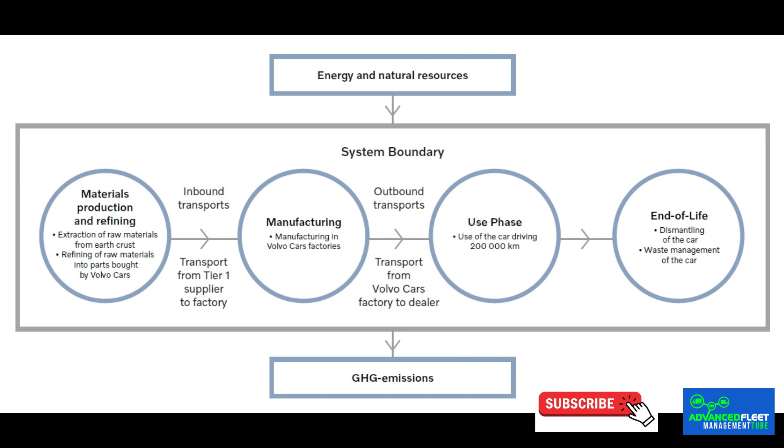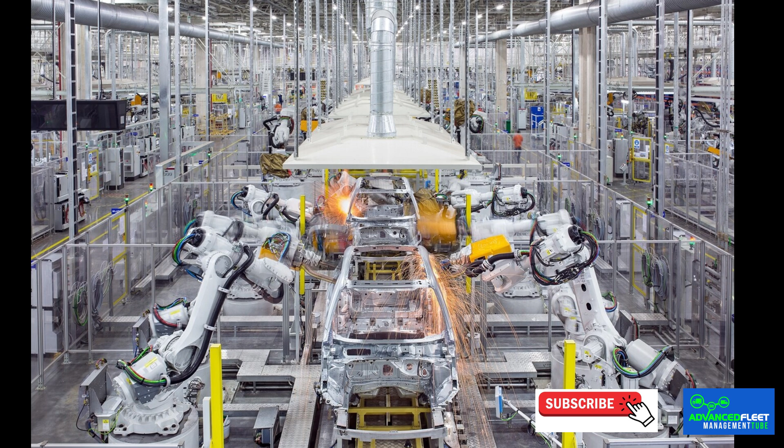And what has Volvo discovered? Manufacturing an electric XC40 involves 70% more CO2 emissions than manufacturing an XC40 with an internal combustion engine, since both cars are built on the same platform and share many of their parts. If we talk only about materials and components, leaving aside battery cells, the manufacturing of an XC40 Recharge causes almost 30% more greenhouse gas emissions compared to the XC40 gasoline, mainly due to the higher use of materials in the XC40 Recharge and the higher proportion of aluminum.

Manufacturing an electric car emits more CO2 than manufacturing a gasoline car. This means that these electric cars arrive at the dealership having already emitted more CO2 compared to the gasoline version. Now, we must also take into account the use of the car. Once they begin to circulate, the electric car will hardly involve CO2 emissions, while the gasoline car will continue to emit CO2 in greater proportions. While the carbon footprint of electric vehicles is being drastically reduced, that of gasoline is adding more and more CO2 to the equation.

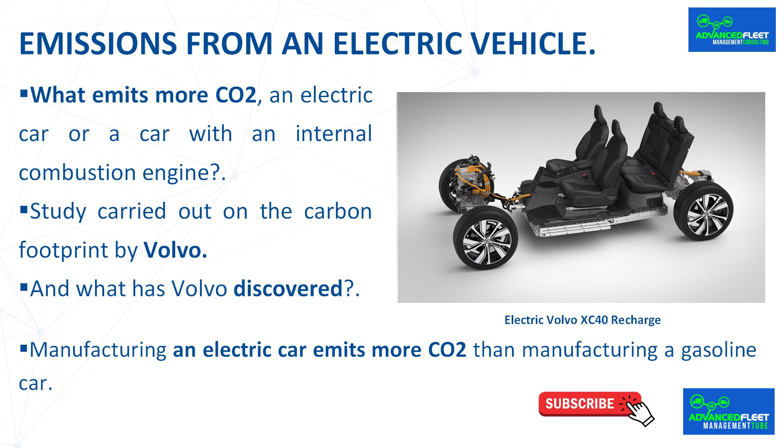The main reasons why producing an electric car has a much larger carbon footprint than manufacturing a gasoline or diesel car are well known. Most greenhouse gases are generated in the mining and processing of the various raw materials that make up the car and the battery, such as lithium, steel, or aluminum. Green NCAP claims that it pollutes less than one with a combustion engine if the entire life cycle of each one is taken into account, around 30% less.

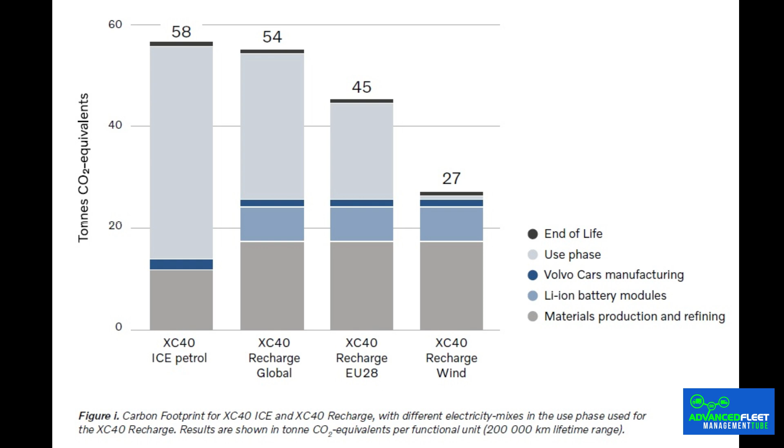Tons of CO2 equivalent. The total polluting emissions for a use of 200,000 kilometers are as follows. The internal combustion XC40 has the most total emissions with 58 tons of CO2 equivalent, followed by the electric with 45 tons of CO2 equivalent, and in first position is the wind-powered electric XC40 with 27 tons of CO2 equivalent.

Implications in fleet management. The most important conclusion is that to achieve the maximum reduction in CO2 equivalent emissions, the electric vehicle with renewable energy must be used for around 200,000 kilometers. It must be considered that if the battery has to be changed to continue using the vehicle, the total pollutant emissions increase and the balance point would be higher. It may happen that we purchase an electric vehicle and do not reach the necessary kilometers from the equilibrium point, and it pollutes more than its gasoline counterpart.

In passenger cars and SUVs in a fleet of vehicles, it is recommended to have a renewal policy of 4 or 5 years and at most 150,000 kilometers, to have new vehicles because they have the latest technologies in safety, batteries, regarding the environment, consumption, etc. Renting contracts for passenger cars or SUVs for this type of vehicle are usually 15,000 kilometers and 4 or 5 years. So in the best of cases, renewable energy would only offset a very low figure of CO2 emissions. And with the mix of the European Union, the emissions would be higher than its gasoline counterpart.

Currently, it is advisable to purchase electric vehicles on rent due to their high depreciation, but to achieve a considerable reduction in polluting emissions by using the electric vehicle with renewable energy, it is necessary to travel about 180,000 to 200,000 kilometers, which is the average run by fleets whose vehicles are more than 8 years old, so you must acquire the vehicle as ownership because there are no leasing companies that make contracts of more than 5 years on this type of vehicle.

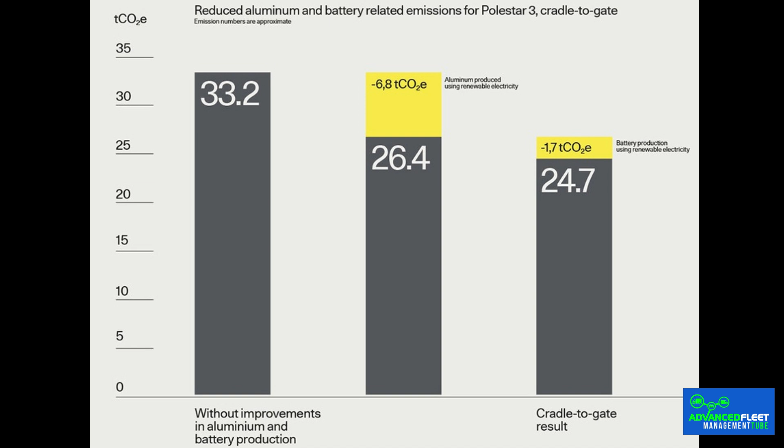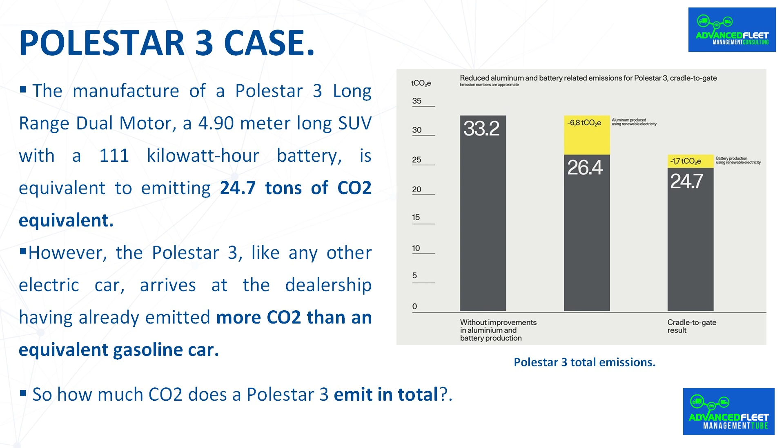In the same scenario, a gasoline Volvo XC40 will emit 58 tons of CO2 equivalent over its entire useful life of 200,000 kilometers. That is to say, even in the worst-case scenario, an imposing Polestar 3 will emit less CO2 than a much smaller and less powerful gasoline car such as the Volvo XC40.

Lithium extraction. With the need to reduce CO2 emissions via the massive use of lithium-ion batteries, we could be creating another problem, just as harmful or more so. Lithium is not found in a free state in nature. It is dispersed in rocks, clay, and brine, a mixture of water and salts. Its extraction is slow, consumes a lot of energy, and requires large quantities of water, an increasingly scarce resource.

To extract lithium from rocks, as is particularly the case in Australia, which is the world's largest producer, and in China, it is first necessary to crush them. After this, water is added to form a paste that is placed in a tank where the air allows the lithium to be separated from the rock. After filtration, the obtained lithium powder is further refined.

To do this, it is heated to a temperature of up to 1000 degrees. Chemicals and water are then added before another filtration. The process, which takes between 1 and 2 months, is expensive due to its high energy consumption. In addition, the use of water and chemicals makes it not very respectful and friendly to the environment.

In the salt deserts of Argentina, Bolivia, and Chile, home to the world's largest lithium deposits, the metal is found in brine, a mixture of water and salts. To extract it, you have to pump the brine from the depths and then place it in giant pools so that the water evaporates. Once the salts have solidified, they are moved to the bottom of the pools after 12, 14, or 16 months, depending on weather conditions.

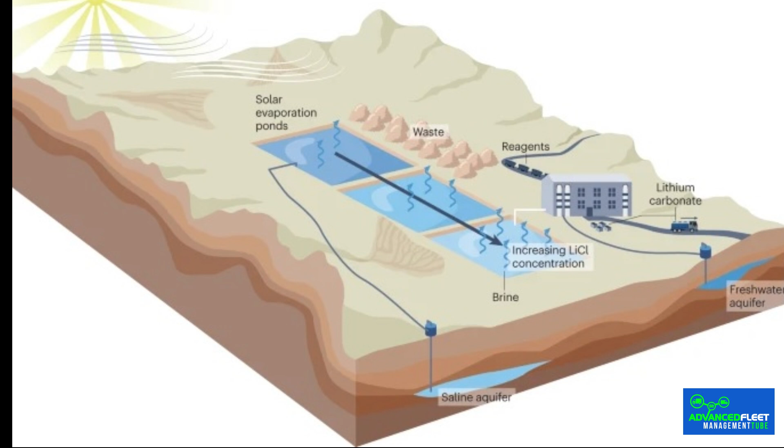The aqueous solution obtained is transferred to another plant, from which, after filtration and the addition of chemicals, lithium carbonate and in some cases hydroxide will emerge. Although less expensive, this extraction method is also slow and above all consumes large amounts of water. Lithium is essential for electric car batteries, and the demand in the next decade will be enormous.

Lithium is present in small quantities in the anodes and cathodes of the cells that make up the battery, and an electric car battery has on average about 160 grams of metallic lithium per kilowatt hour. Manufacturers do not usually reveal that information. Lithium is found in fragile ecosystems.

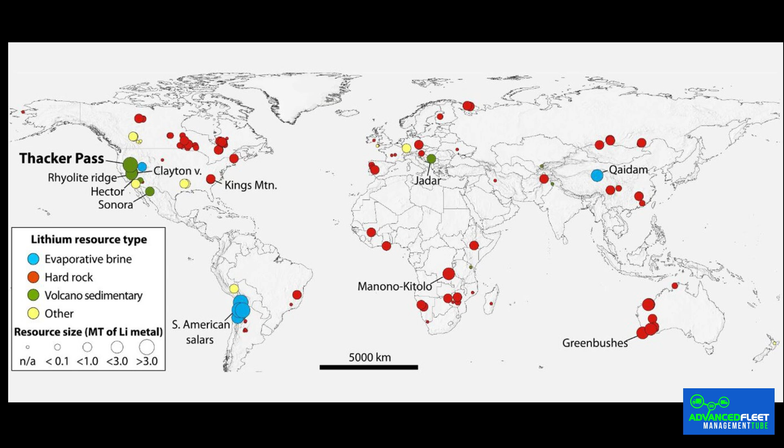It is true that there are large deposits in Chile, in the Atacama Desert, and in the Uyuni Salt Flat in Bolivia, as well as in the province of Salta, Argentina, which is already the third largest producer in the world. In these cases, extraction is quite simple and a priori with low impact in an already arid area, and yet it takes about 2 million liters of water to produce 1 ton of lithium. This enormous water consumption not only affects the surrounding ecosystems, but also has a huge impact on local farmers.

According to the Environment and Natural Resources Foundation, Lithium Extraction in Argentina 2019, which interviewed the 10 communities that live near 2 salt mines, Sales de Jujuy and Minera Exar, the mine's detractors say they are concerned about the long-term impact of lithium on the environment, starting with the lowering of the water table, stating that livestock in the region have already begun to die. The consequences of mining on the ecosystem have also been seen in other regions of the world.

In May 2016, hundreds of protesters threw dead fish into the streets of Tagong, a city on the eastern edge of the Tibetan Plateau. They had been pulled from the waters of the Liqi River, where a toxic chemical leak from the Ganzizhou Rongda lithium mine had wreaked havoc on the local ecosystem, and it could go further. Research conducted in Nevada, where lithium is also mined, found impacts on fish up to 150 miles downstream from a lithium processing operation. Now the entire industry relies on the new deposits inside the Arctic Circle.

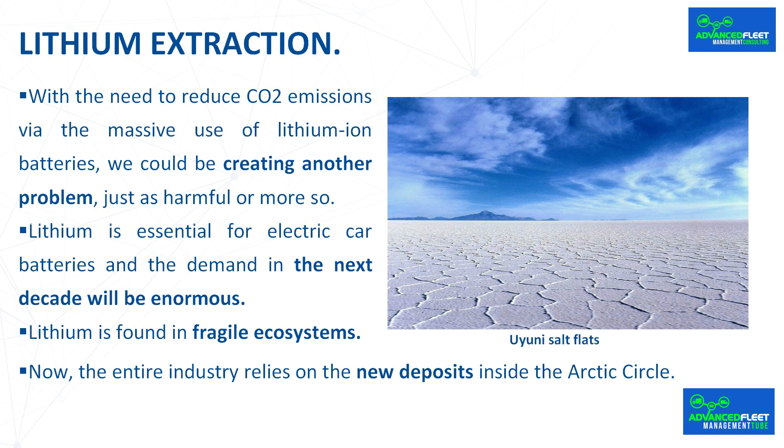Russian state mining company Rosatom, which also mines lithium for nuclear weapons, is studying the possibility of opening a mine on the Kola Peninsula by 2030. This site, called Kolmozero, is located within the Arctic Circle. Furthermore, also in the Arctic Circle, the Swedish company Arctic Minerals AB has reserved other exploitable land.

According to Jari Natunen, a mining expert at the Finnish Association for Nature Conservation, mining in the Arctic would be catastrophic. He says that the difficult extraction of lithium from the frozen earth would generate 50,000 tons of toxic waste for 1,000 tons of lithium produced.

The Arctic Circle has already borne much of the cost of materials for electric vehicles, as the Norilsk nickel mine, the most polluted place in the world, provides the material that is replacing the problematic cobalt and has only generated a new problem. Environmental implications of lithium extraction.

There are 4 environmental implications of starting a lithium mining industry. The viability of any lithium extraction project will depend on an adequate response to each of them. 1. Responsible use of water. Lithium extraction often involves intensive use of water in the mining and extraction processes, which can have an impact on local water resources. It is important to implement efficient and sustainable water management practices and ensure that water supplies for local communities, agriculture, or other essential uses are not compromised.

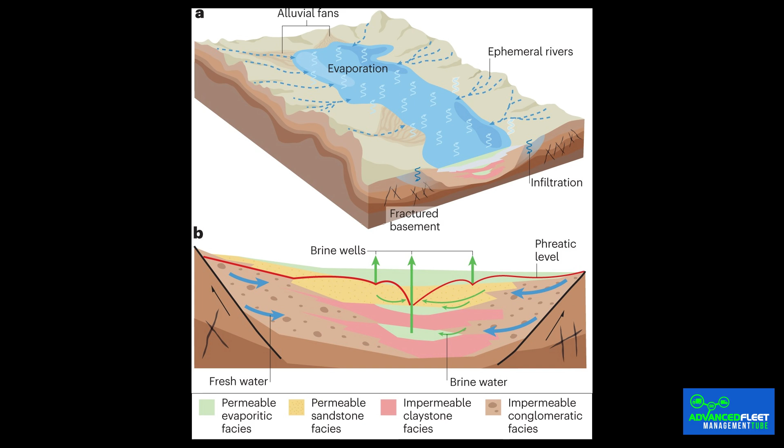2. The correct management of waste and chemicals must be taken into account. An industry of this type will generate waste and chemical emissions that must be managed appropriately. It is essential to carry out exhaustive environmental impact studies and apply mitigation measures to protect the biodiversity of the affected areas.

3. Energy use and carbon emissions. While lithium is a key component in the transition to cleaner energy, the extraction and processing of the mineral requires a considerable amount of energy, so it will be advisable to look for renewable energy sources that minimize the carbon footprint of the entire company supply chain.

4. Take into account the participation and consultation of local communities. Lithium extraction can have a significant impact on local communities, both in terms of employment and changes to their environment. For this reason, it is essential to involve communities in the decision-making process, provide clear and transparent information on possible impacts, and ensure that adequate risk and benefit assessments are carried out before starting any project.

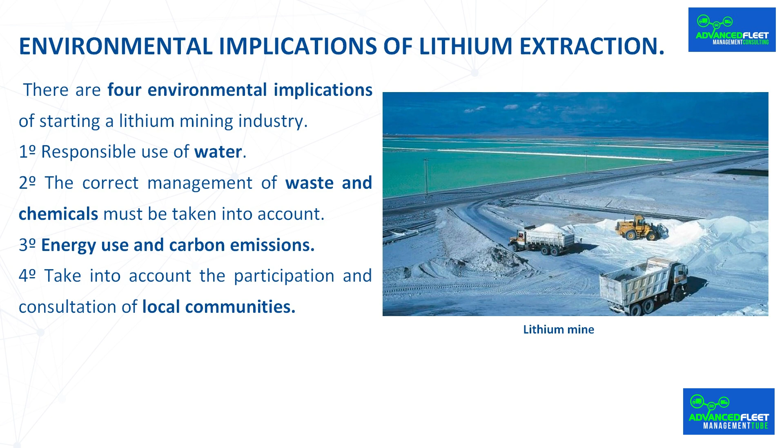The unknown emissions of electric vehicles. The dilemma of batteries and PFAS. PFAS are a collection of more than 4,700 widely used synthetic chemical compounds that accumulate over time in humans and the environment. Lithium-ion batteries found in mobile phones and electric cars also contain these PFAS. Research finds a new subclass of chemical contaminants, PFAS, used in lithium-ion batteries. It is becoming an increasing source of air and water pollution.

The team of researchers found that PFAS, specifically bis-perfluoroalkyl sulfonimides, exhibit similar environmental persistence and ecotoxicity to older well-known compounds such as perfluorooctanoic acid. The dilemma posed by the manufacture, disposal, and recycling of these chemical agents in a lithium battery forces us to develop recycling technologies and solutions that combat the climate crisis without releasing highly persistent pollutants.

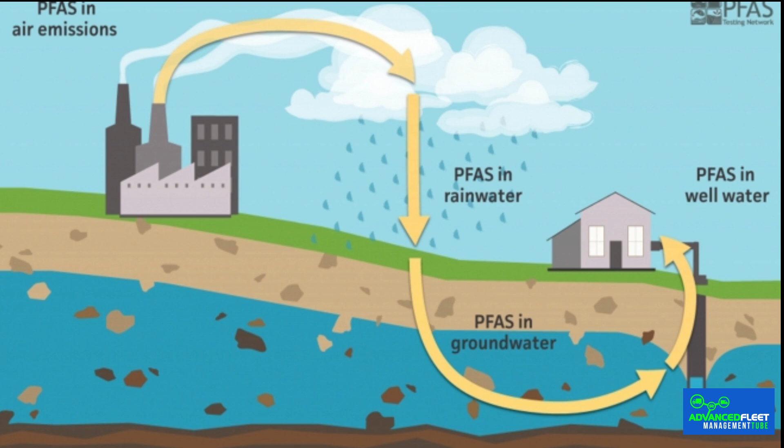PFAS and their drawbacks. Researchers sampled air, water, snow, soil, and sediment near manufacturing plants in Minnesota, Kentucky, Belgium, and France, finding high concentrations of bis-FASIs. Furthermore, atmospheric emissions of bis-FASIs can facilitate their long-distance transport, also affecting areas far from manufacturing sites. Analysis of municipal landfills in the southeastern U.S. suggests that these compounds may enter the environment through the disposal of products, including lithium-ion batteries.

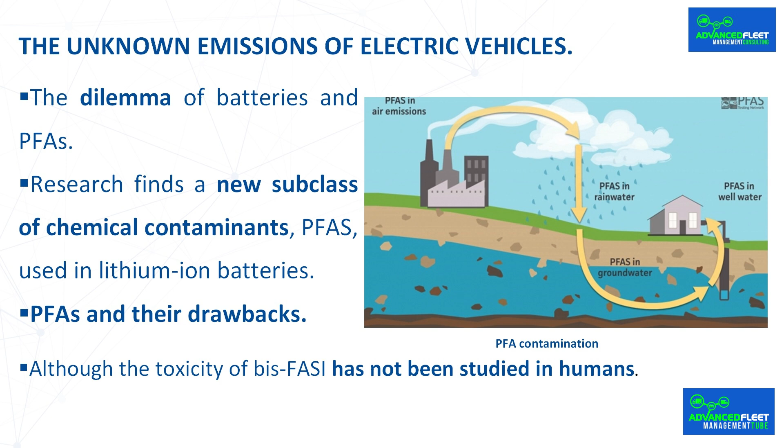Although the toxicity of bis-FASIs has not been studied in humans, other PFAS are linked to cancer, infertility, and other serious health harms. Treatability testing indicated that bis-FASIs do not break down during oxidation, but their concentrations in water could be reduced using granular activated carbon and ion exchange, methods already used to remove PFAS from drinking water. Treatments developed to remove PFOA and PFOS may also work for bis-FASIs, and their use is likely to increase as treatment facilities are upgraded to meet EPA's new maximum contaminant levels for PFAS.

Materials used in the electric vehicle. The most used materials in the manufacture of electric vehicles are aluminum, steel, and battery materials. The European Federation of Transport and Environment has revealed an analysis highlighting the importance of the use of green steel in the automotive industry. Steel produced using green hydrogen and electric arc furnaces or from scrap metal has the potential to reduce CO2 emissions.

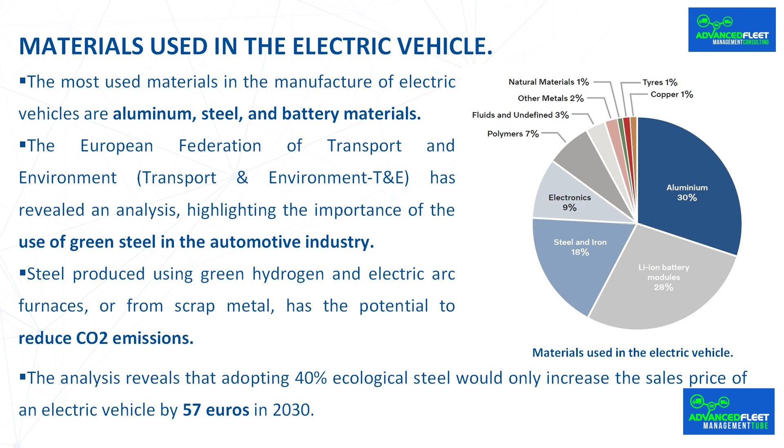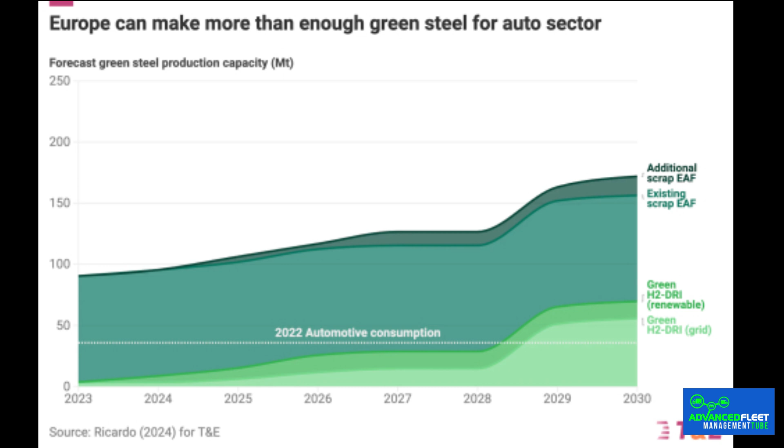The analysis reveals that adopting 40% ecological steel would only increase the sales price of an electric vehicle by €57 in 2030. Furthermore, achieving 100% green steel in 2040 would have a negligible additional cost of only €8 compared to conventional steel due to CO2 pricing and the reduction of production costs of green steel.

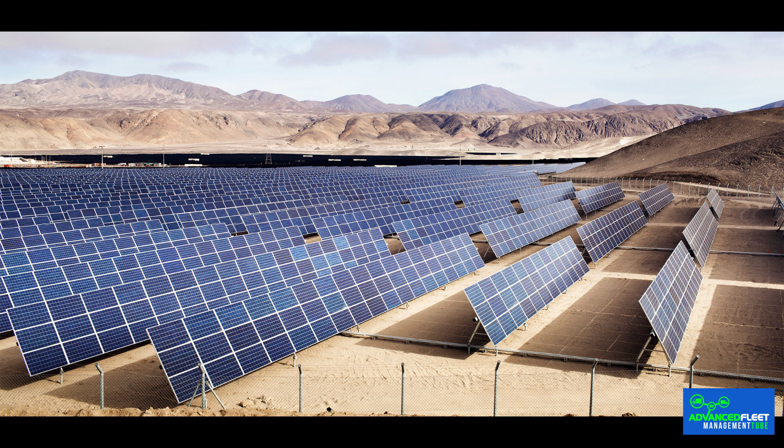Energy used in the electric vehicle. How the energy used in the electric vehicle has been generated is essential. To achieve the maximum reduction in CO2 equivalent emissions, the electric vehicle must be used with renewable energy such as wind, geothermal, hydroelectric, tidal, solar, or wave energy.

It is necessary to know the origin of the energy that is being used to recharge electric vehicles. It is best to use energy generated by renewable energies to calculate the equivalent CO2 emissions of the vehicle fleet. You can use energy generated in our facilities by solar panels or windmills, or contract renewable energy with an energy company, or do both at the same time.

Energy mix of the countries. In some countries, they do not have a supply of all the energy generated by renewable energies, so polluting emissions have been generated in the generation of energy in the use of electric vehicles. There is an open source interactive map that allows any interested citizen of the world to understand the energy mix of each country or the climate impact of the electricity consumed in real time, to understand what is behind the simple gesture of turning on the light or recharging the battery of your electric car.

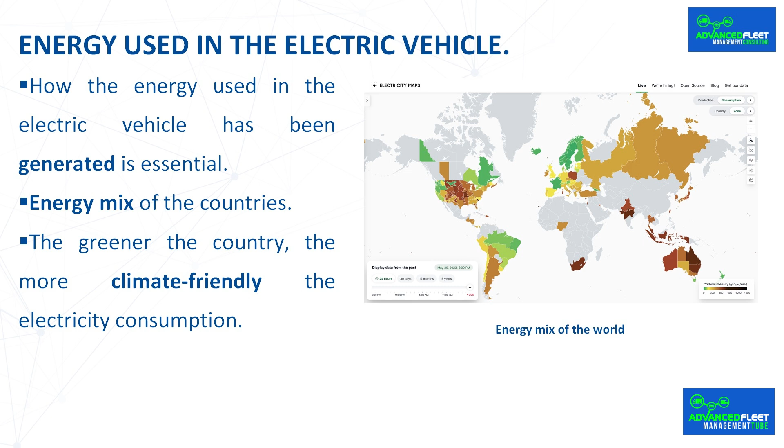Electricity Maps is a small startup from Denmark and France that wants to publicize the climate impact of the electricity consumed around the world based on data made public by electricity grid operators, official agencies, and others. With them, they calculate the amount of greenhouse gases emitted for each unit of electricity consumed. The greener the country, the more climate-friendly the electricity consumption. In Europe, there are not too many countries painted green. Norway, Iceland, and Sweden are represented as those that produce the least CO2 emissions with their electricity, followed by Finland and France.

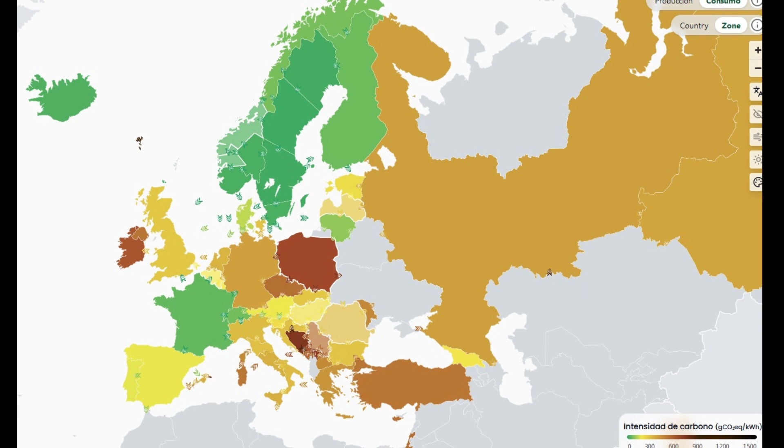In the case of the latter, we can see how today there is only 28% renewable in their energy mix, and yet they generate almost clean electricity thanks to nuclear power. In fact, over the past 10 years, France was Europe's leading electricity exporter thanks to a large nuclear fleet that

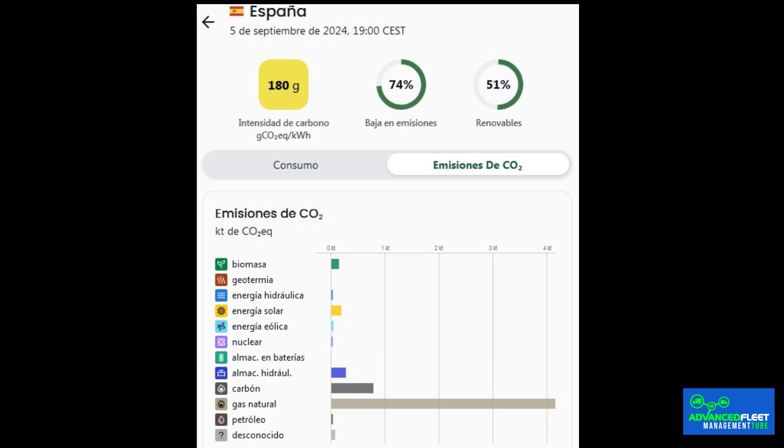produces low-cost, low-carbon electricity. Spain, which in 2023 has broken a historical record in renewable energy generation, is painted yellow and pollutes 3 times more when it comes to producing electricity than France, since natural gas continues to be the most used, most expensive, and most polluting source. Germany is one of the countries with the most installed solar energy, but due to coal, it has emissions of 350 grams of CO2 equivalent per kilowatt hour.

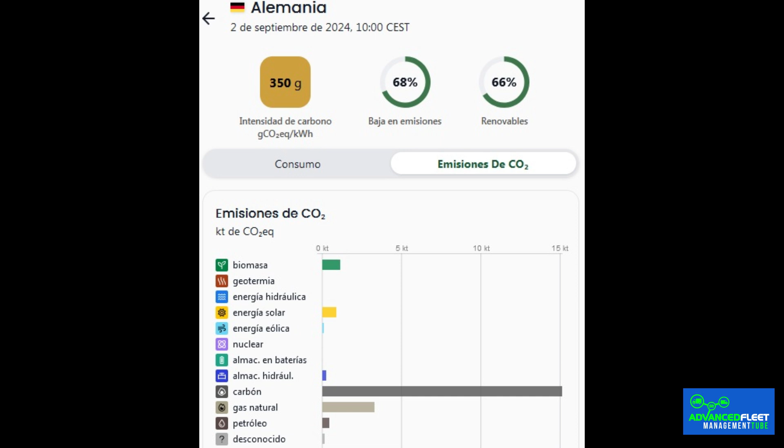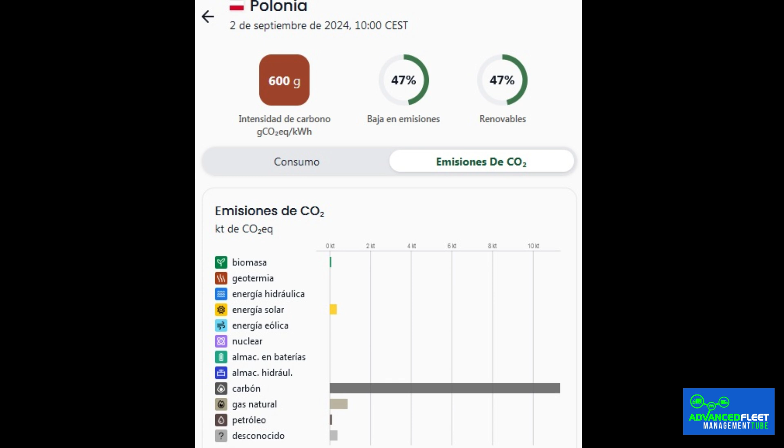Poland has a very high figure of 600 grams of CO2 equivalent per kilowatt hour for coal. If we were to use this generation mix, the electric vehicle would not make any sense because it would have more CO2 equivalent emissions than its gasoline counterpart. Although Poland has an energy mix of 600 grams of CO2 equivalent per kilowatt hour, you can surely contract 100% renewable energy with an energy company. The energy mix of the United States is very varied depending on the state.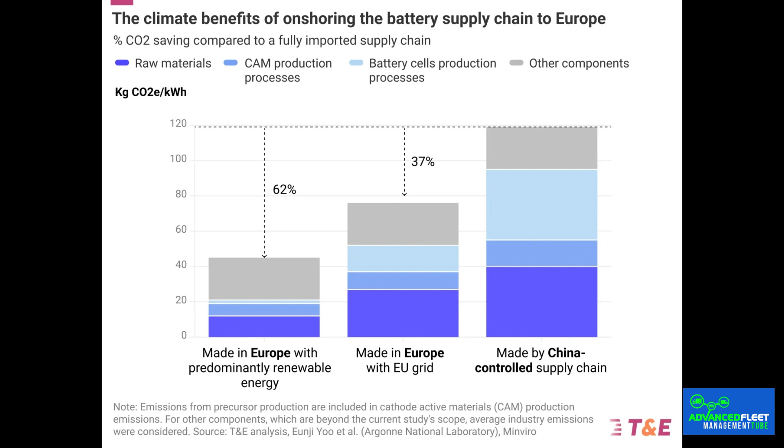Battery manufacturing. Currently, to analyze the environmental impact of batteries, the amount of electricity necessary to manufacture them is taken into account. But the European Union wants to take into account the origin of the electricity used in these batteries. It is not the same in China, the world's largest producer of batteries, as it is in South Korea or Spain. In Spain, there is an energy mix with a large proportion of renewables, which helps to have very low

polluting electricity. The idea is to introduce, starting in 2027, the national energy mix factor in the calculations of the carbon footprint of the production of a battery and the electric vehicle. The goal is to reduce the carbon footprint of vehicles and reward countries that have cleaner electricity production.

According to a new analysis by the European Federation of Transport and Environment, a battery manufactured in China generates about 120 kilos of CO2 equivalent per kilowatt hour of capacity, while manufacturing it in Europe with the current energy mix would lower that figure to 76 kilos of CO2 equivalent per kilowatt hour. With predominantly renewable generation, emissions would drop by 62% to about 45 kilos of CO2 equivalent per kilowatt hour.

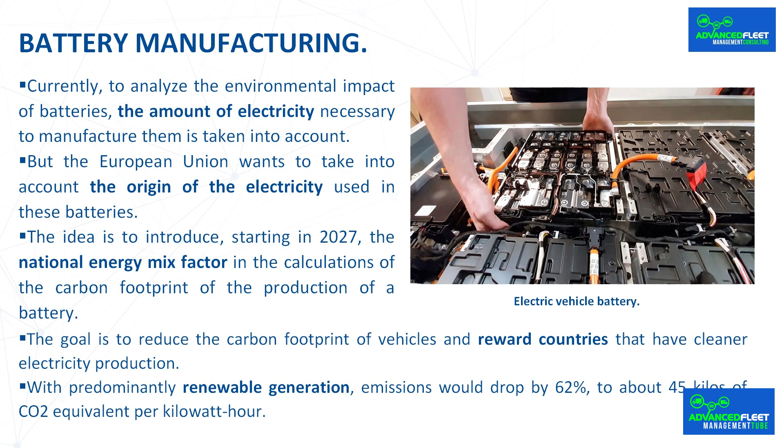Polluting emissions from internal combustion engines. Every combustion process has an associated problem of polluting emissions. The amounts of polluting emissions are highly variable, depending on the type of engine, degree of load, mixture dosage, or combustion chamber temperature. They are mainly due to chemical imbalance due to freezing of equilibrium reactions when gases cool. Others are products of combustion failures, partial oxidation of the fuel, pyrolysis and dehydrogenation particles.

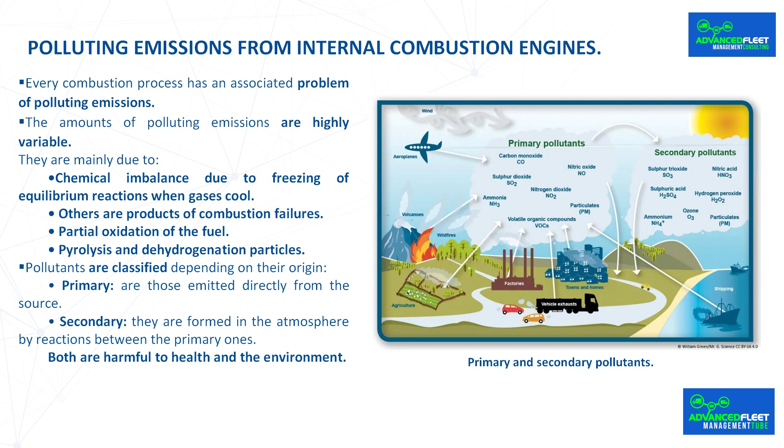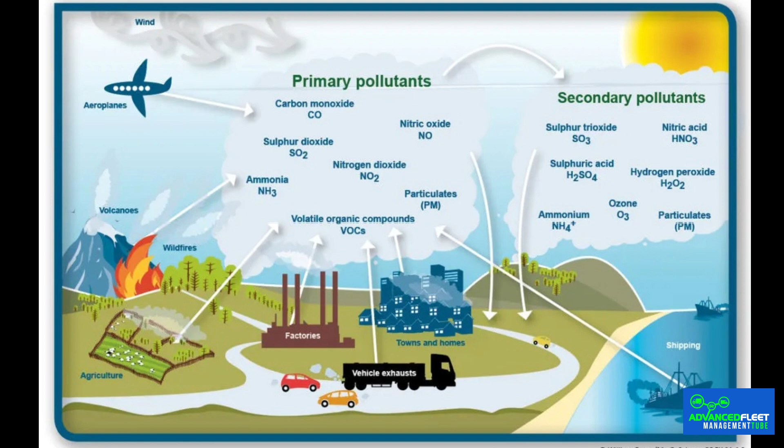Pollutants are classified depending on their origin. Primary are those emitted directly from the source. Secondary are formed in the atmosphere by reactions between the primary ones. Both are harmful to health and the environment. Polluting emissions from internal combustion engines. The main contaminants of the combustion process in an engine are nitrogen oxides NOx, carbon monoxide CO, carbon dioxide CO2, which contributes to the greenhouse effect, unburned or partially burned hydrocarbons HC, PM particles, sulfur oxides SOx.

In vehicles, pollutants are measured using different measures such as the amount of pollutant per distance traveled in grams per kilometer, grams per megajoule, percent volume, parts per million or billion, or milligrams per second. Polluting emissions from internal combustion engines. The four main effects of polluting emissions on the troposphere are alteration of atmospheric properties and precipitation, damage to vegetation, deterioration of materials, and potential increase in diseases and mortality in humans.

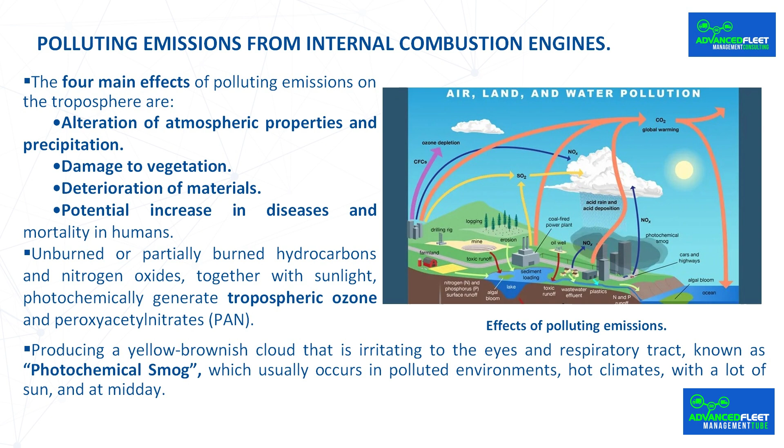Unburned or partially burned hydrocarbons and nitrogen oxides together with sunlight photochemically generate tropospheric ozone and peroxyacetyl nitrates, producing a yellow-brownish cloud that is irritating to the eyes and respiratory tract, known as photochemical smog, which usually occurs in polluted environments, hot climates, with a lot of sun, and at midday.

NOx polluting emissions. The term nitrogen oxide refers to various chemical compounds formed by the combination of oxygen and nitrogen, such as NO2, N2O2, N2O4, N2O, N2O3, N2O5, and NO3. NOx is the generic way of designating the nitrogen oxides emitted by the engine, mainly NO and NO2.

NOx is due to the oxidation of atmospheric nitrogen N2, the main component of air, at high temperatures with a high oxygen content. In engines, NO is mainly generated, and secondary NO2 is generated due to the conversion of NO to NO2. The amount of NO2 reaches values between 10 and 30% of NOx emissions, having greater potential than NO for the formation of acid rain and photochemical smog.

NO is generated in the combustion process by three mechanisms. Thermal: it is the most important at high temperatures, and is produced by the oxidation of nitrogen present in atmospheric air, being the oxidant of combustion. In diesel engines that generally tend to work with lean or close to stoichiometric mixtures, the main reactions that govern the formation of NO are those developed by Zeldovich, and which are used to estimate NO emission.

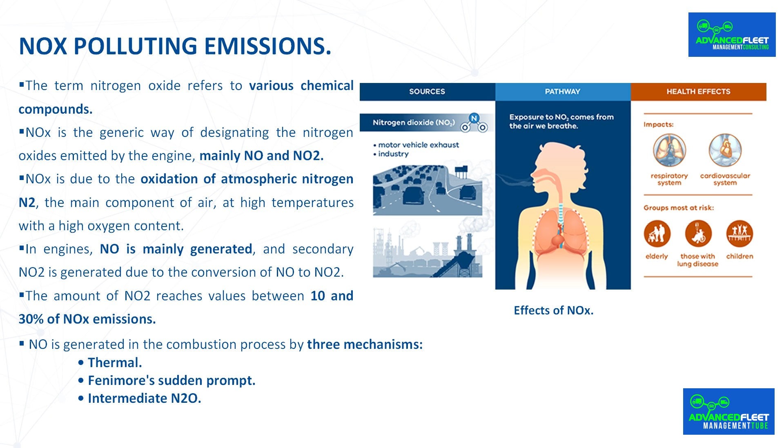Fenimore's sudden prompt. It is formed in the first phase of combustion, when atmospheric nitrogen reacts with hydrocarbon radicals existing in the air. Intermediate N2O. It is important at low temperatures and in the combustion of lean mixtures. The best known processes are those of Lavoie and Turns.

NOx polluting emissions. NOx are one of the main causes of acid rain and producer of photochemical smog. In contact with rainwater, NO2 produces nitrous acid and nitric acid. NO2, reddish-brown in color and with a pungent odor, irritates the lungs and reduces resistance to infectious diseases if the level exceeds 600 milligrams per cubic meter. NO reduces ozone in the stratosphere, facilitating the passage of ultraviolet solar radiation to the Earth's surface.

Nitrous oxide has a great impact on the greenhouse effect, which is 296 times more effective than CO2, and its great stability in passing through the atmosphere and participating in the destruction of stratospheric ozone, although the concentration in the exhaust gases is very small.

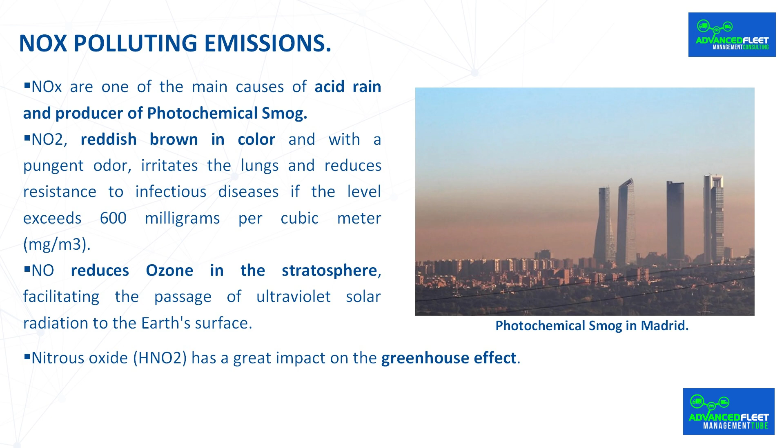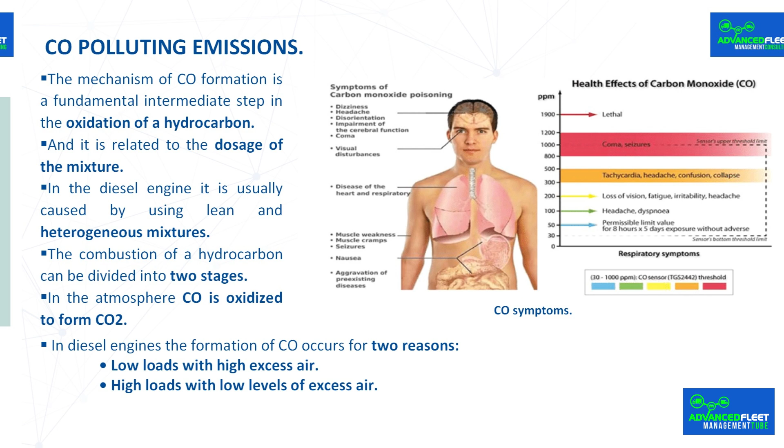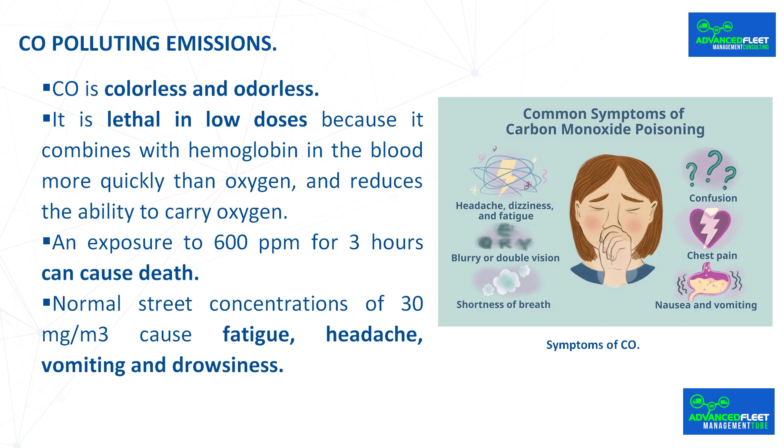CO polluting emissions. CO is colorless and odorless. It is lethal in low doses because it combines with hemoglobin in the blood more quickly than oxygen and reduces the ability to carry oxygen. An exposure to 600 parts per million for 3 hours can cause death. Normal street concentrations of 30 mg per cubic meter cause fatigue, headache, vomiting, and drowsiness.

CO2 polluting emissions. CO2 is formed by the oxidation of hydrocarbon in the combustion process. CO2 emissions are directly proportional to fuel consumption. In a diesel engine, approximately 2.67 kilograms of CO2 are produced from the tank to the wheel for each liter of fuel, and in a gasoline engine, 2.42 kilograms of CO2 are produced. They depend on two parameters that describe their composition: the hydrogen-carbon ratio and the oxygen-carbon ratio.

Fuels with low carbon concentrations such as ethanol, biodiesel, natural gas, etc., generate less CO2 than diesel. A diesel vehicle with the same characteristics and power has fewer emissions of grams of CO2 per kilometer than the equivalent gasoline vehicle because it consumes less, although its CO2 emissions value from the tank to the wheel is higher.

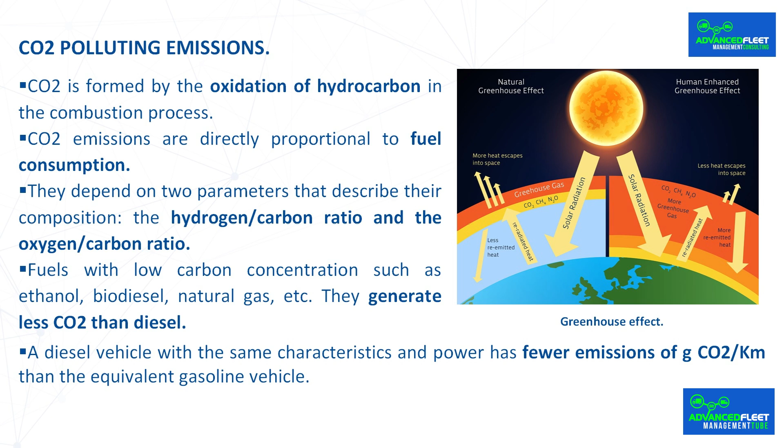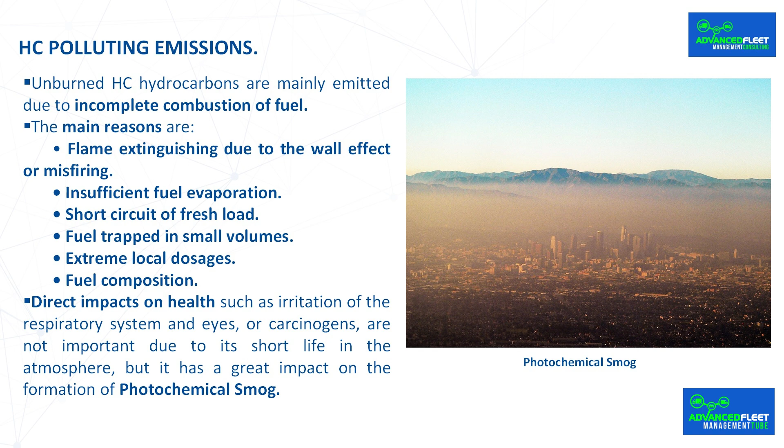HC polluting emissions. Unburned HC hydrocarbons are mainly emitted due to incomplete combustion of fuel, and its composition is very heterogeneous. The main reasons are flame extinguishing due to the wall effect or misfiring, insufficient fuel evaporation, short circuit of fresh load, fuel trapped in small volumes, extreme local dosages, and fuel composition. Direct impacts on health such as irritation of the respiratory system and eyes or carcinogens are not important due to its short life in the atmosphere, but it has a great impact on the formation of photochemical smog.

HC polluting emissions. There are two main hydrocarbons emitted. The main hydrocarbon emitted are polycyclic aromatics, PAH. At least 32 types have been found. They are formed during the incomplete combustion of organic matter. The most common PAHs in engine emissions are naphthalene, phenanthrene, pyrene, chrysene, and fluoranthene, and they are probable carcinogens.

The other main hydrocarbon emitted are carbonyl compounds. These compounds are not present in the fuel, but appear in intermediate stages of combustion. The different oxygenated compounds found among hydrocarbons are alcohols, phenols and derivatives, aldehydes and ketones, and carboxylic acids and derivatives. Polluting emissions: particles.

A particle is any matter present in the exhaust gases that is in a solid or liquid state under ambient conditions. There are two groups of particles. The primaries are formed as a product of the combustion process. Secondary ones result from processes such as sedimentation, evaporation, condensation, growth by collision, etc., which occur both in the exhaust and in the atmosphere, and which are regulated in the different anti-pollution regulations.

Soot is the initial substrate for the particles. There is a relative dosage limit in which it appears. Along the exhaust there is a reduction in gas temperature, and the soot agglomerates are subjected to hydrocarbon adsorption and condensation phenomena, causing the formation of particles.

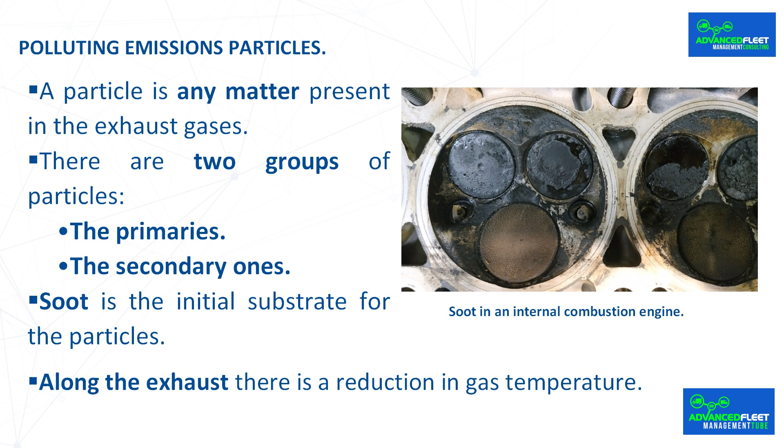Polluting emissions: particles, PM, particulate matter. The danger of particles depending on their size may be different depending on the fuel used. In general, the smallest particles are the most dangerous for the following reasons. Greater likelihood of inhalation, penetrating the lungs and bloodstream. They have a longer residence time in the atmosphere.

The residence time of particles of 0.10 microns is 1 week, causing a decrease in atmospheric visibility and contributing to the fouling of buildings. They have a greater specific surface area, which facilitates the adsorption of potentially carcinogenic organic compounds. There are particles emitted by brake pads, tires, or asphalt, and regulation is beginning to be studied to limit their emission.

Emissions Analytics has carried out tests using a medium-sized sedan with new tires inflated to the manufacturer's recommended pressure. After measurements, they discovered that the car was emitting 5.8 grams of particles per kilometer due to the tires and brakes, a figure more than 1,000 times higher than the limit established for particles in exhaust gases, which cannot exceed 4.5 milligrams per kilometer. The problem could be even worse if the tires were underinflated or the road surface was rougher, which wears more rubber.

The study has focused on PM 2.5 and PM 10 particles, tiny particles whose diameter is less than 2.5 and 10 microns respectively. These types of particles are very dangerous due to their high potential damage to health. The wear generated by the tires and the dust that comes out of the brakes when they rub against the pads and discs are the causes of these emissions.

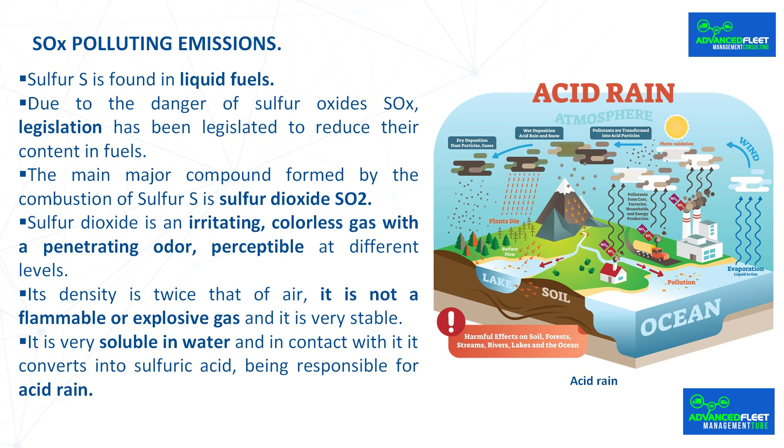Sulfur dioxide is an irritating colorless gas with a penetrating odor, perceptible at different levels. Its density is twice that of air, it is not a flammable or explosive gas, and it is very stable. It is very soluble in water, and in contact with it, it converts into sulfuric acid, being responsible for acid rain. SO2 can produce the following adverse effects, even at great distances from the emitting source.

Health, as irritation and inflammation of the respiratory system, lung conditions and insufficiencies, alteration of protein metabolism, headache or anxiety. Biodiversity, soils and aquatic and forest ecosystems, causing damage to vegetation, degradation of chlorophyll, reduction of photosynthesis and the consequent loss of species. Buildings, through acidification processes.

Once emitted, it reacts with water vapor and other elements present in the atmosphere so that its oxidation in the air gives rise to the formation of sulfuric acid. In addition, it also acts as a precursor for the formation of ammonium sulfate, which increases the levels of PM10 and PM2.5 with serious consequences on health as well.

Technologies to reduce polluting emissions. CO2 emission cannot be reduced or decreased. For each liter of fuel, 2.67 kg of CO2 are produced in a diesel engine and 2.42 kg of CO2 in a gasoline engine, from the tank to the wheel.

For the rest of the emissions, a combination of technologies is currently used to reduce their values depending on the substance and what is wanted to be obtained at the end of the exhaust line. The technologies most used in engines to reduce polluting emissions are catalysts, the particle filter, the EGR valve, and the SCR combined with the AdBlue additive.

The problem of polluting emissions in diesel engines occurs at specific times, such as engine warm-up, strong acceleration and high load circulation, and this is where action must be taken to have low polluting emissions. During the rest of the time in which the different exhaust gas after-treatment systems operate optimally, the NOx emissions of a diesel are so low that they can be compared to a gasoline engine.

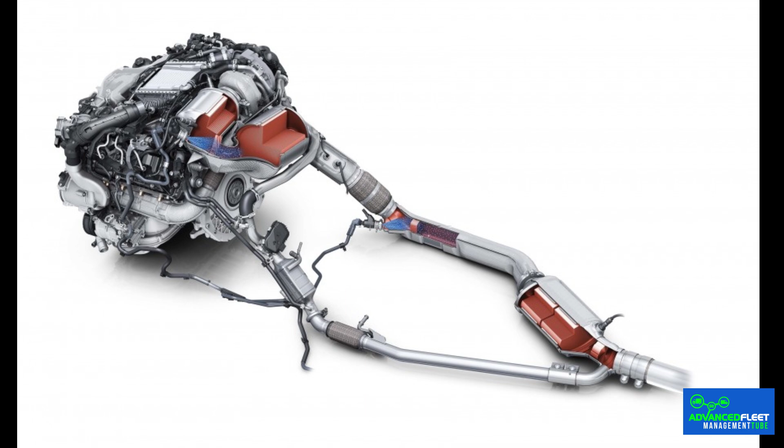Exhaust emissions after-treatment systems are installed along the exhaust line to destroy substances before emitting them into the atmosphere, and they can operate with different principles such as avoiding certain chemical reactions at low temperatures, oxidation and reduction, provoke or accelerate chemical oxidation reactions of HC or soot, or the accumulation by physical or chemical means of substances. The installation of after-treatment systems does not affect the mixture formation and combustion system, place where polluting emissions occur.

Environmental impact of energy generation with fossil fuels. It must be emphasized that there are studies quantifying deaths and illnesses caused by energy generation with fossil fuels. Burning coal generates harmful dust particles that can be transported long distances from where they were generated at the coal-fired power plant, crossing borders and countries far from where they were emitted. Citizens who do not live nearby can breathe these particles and suffer serious consequences for their health.

The 2016 Dark Cloud Over Europe report analyzes the health impacts of burning coal and highlights that coal plants are obsolete and are responsible for 18% of the European Union's total greenhouse gases. This report warns of the serious impacts on the health of Europeans of the emission of gases from thermal power plants. Some of the most notable data: of the 280 coal-fired power plants operating in Europe, 257 are responsible for 22,900 premature deaths, 11,800 new cases of chronic bronchitis, and 21,000 hospital admissions, 538,000 asthma attacks in children, as well as 6.6 million lost workdays in 2013.

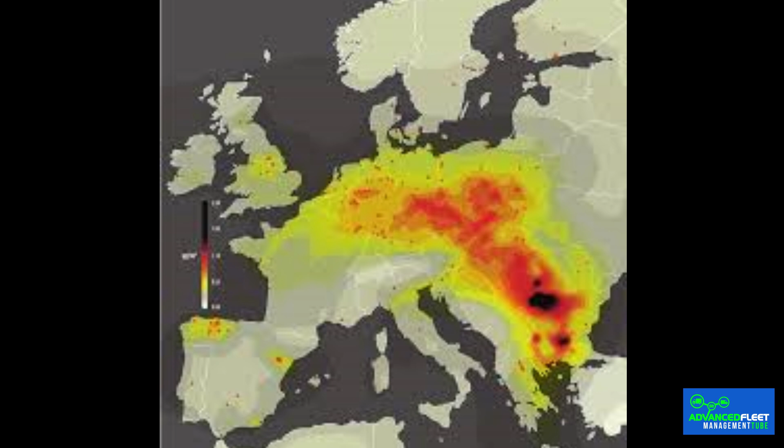The place where polluting emissions occur has more or less environmental impact. The ideal is the use of renewable energy in the electric vehicle, but if it is generated with fossil fuels, it has an environmental impact. Power generating plants that use coal or natural gas are mostly in rural areas, where polluting emissions are dispersed more into the air and have a smaller impact than if they were in a city where they are more concentrated and where a larger population lives.

CO2 emissions. CO2 emissions are responsible for the greenhouse effect and climate change, and have the same impact on the environment regardless of where they occur. Emissions of NOx, CO, HC, etc. have a greater impact in urban environments than in rural ones, because they are concentrated and manifest as a kind of grayish cloud visible from a certain distance, reducing air quality, causing the appearance of respiratory diseases, cancer, etc. in a larger population. The advantage of the electric vehicle. And this is one of the advantages of the electric vehicle compared to the internal combustion engine, which does not emit NOx, CO, HC, etc. in urban environments that cause respiratory diseases.

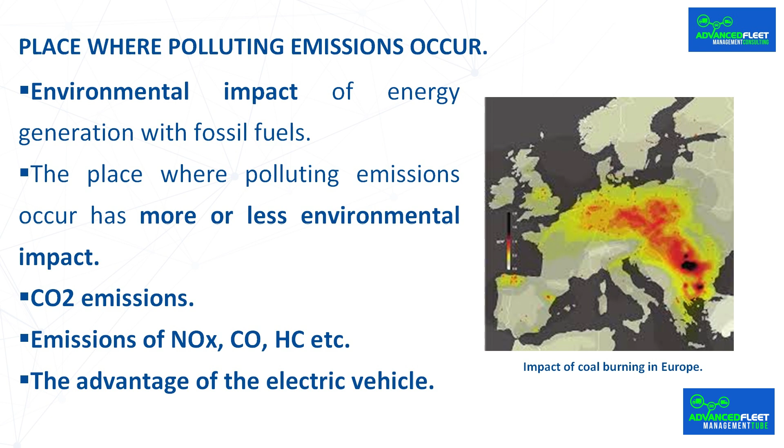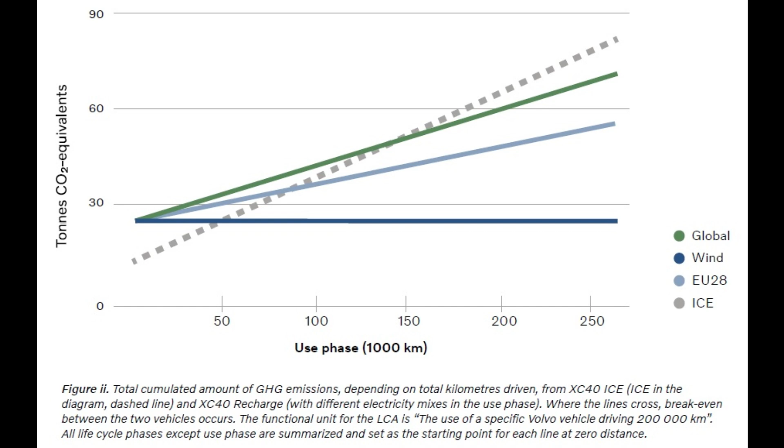Implication in fleet management. The advantages and disadvantages of the electric vehicle with respect to polluting emissions are the following. 1. The advantages are: it emits less CO2 than its fossil fuel counterpart above the break-even point. They do not emit NOx, CO, HC, etc. in urban environments that cause respiratory diseases and other diseases harmful to health. 2. The disadvantages are: it emits more CO2 than its fossil fuel counterpart below the break-even point. The environmental impact of mining battery materials such as lithium, cobalt, rare earths, etc. is very high. If energy is generated with fossil fuels, it emits polluting emissions.

The fleet's polluting emissions must be quantified. It is necessary to know the polluting emissions generated by fleet vehicles. Currently, electric vehicle emissions can be quantified from well to wheel. There are different international standards to do so.

But the emissions generated from the extraction of lithium, steel, etc., up to the recycling of the vehicle, they must also be considered as belonging to the vehicle and the fleet. Currently, there is no data to carry out this measurement, except for the study published by Volvo, but we must know that these emissions exist. The European Union wants all this data to be public starting in 2027, and that is when all polluting emissions from electric vehicles can be calculated.

100% renewable energy. In order to reduce polluting emissions as much as possible, renewable energy must be used. It is important to contract with an energy company to purchase renewable energy. If energy from fossil fuels is used, the reduction in polluting emissions will be lower, or may even pollute more than the equivalent internal combustion vehicle, in addition to increasing the balance point. There is a balance point of kilometers to be traveled, in which the electric vehicle pollutes less than its internal combustion counterpart. This balance point is lower if we use renewable energy than with energy generated with fossil fuels.

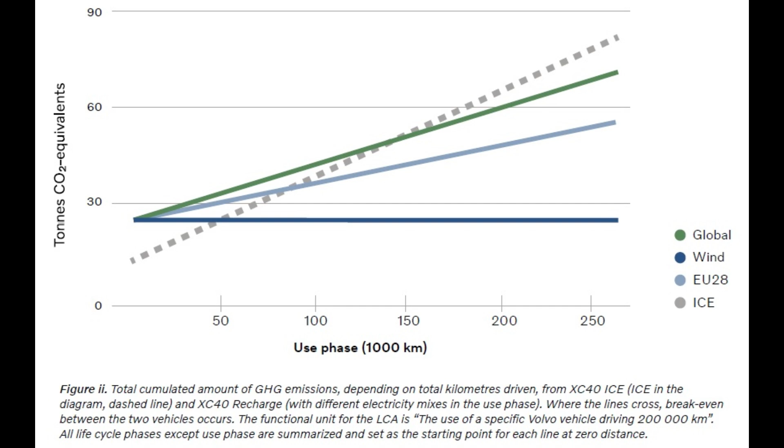The electric vehicle can pollute more than an internal combustion vehicle if the necessary kilometers are not traveled to reach the balance point, in addition to the impact on the environment of the mining of lithium, cobalt, rare earths, etc. To achieve a significant reduction in emissions, the electric vehicle must be used for a high number of kilometers, in the Volvo study up to 200,000 kilometers, which is when the battery is supposed to be changed.

Normally, this type of SUV vehicle is available for more than 8 years, and it is not likely that the vehicle can be acquired through renting, so it would have to be acquired as property. The electric vehicle with this high mileage, and if the battery has to be changed, has zero residual value. If we keep the vehicle and change the battery, the total emissions and the balance point increase.

Change in renewal policy. It is recommended to have a renewal policy to have new vehicles 4 or 5 years or no more than 150,000 kilometers. When using the electric vehicle for more than 8-10 years or more than 200,000 kilometers to achieve the maximum reduction in polluting emissions, the renewal policy completely changes. The new renewal policy is to travel the maximum number of kilometers without changing the battery, so the average age of the fleet will be very high. From my experience, from a certain age on vehicles of this type, which is usually from 6-7 years, operating costs such as maintenance, breakdowns, accidents, etc., increase exponentially.

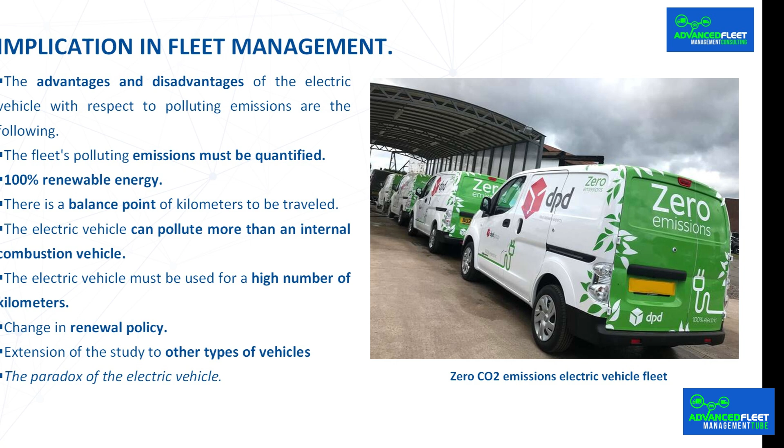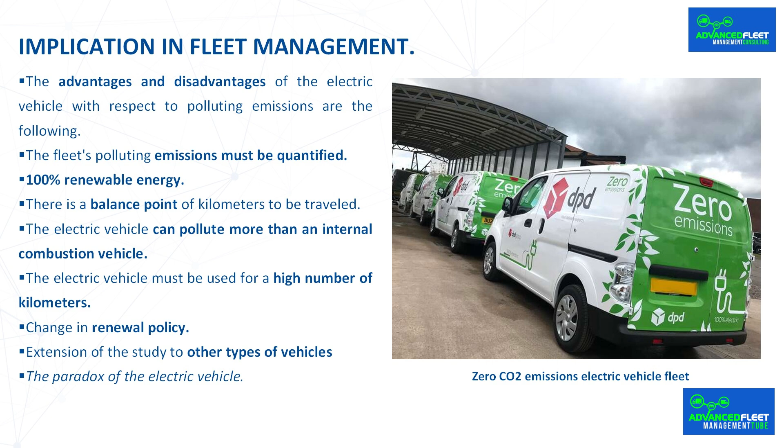But as developed in the Volvo study, if the break-even point is not reached, the electric vehicle has more total CO2 equivalent emissions than its fossil fuel counterpart, in addition to the environmental impacts of the extraction and processing of the battery materials such as lithium, cobalt, rare earths, etc. And the paradox is that the new electric fleet has even more total polluting emissions than what we had with fossil fuel vehicles, and that the opinion of society, customers, shareholders, managers and employees of the company, etc., is that we have a zero-emission fleet because 100% electric vehicles are used.